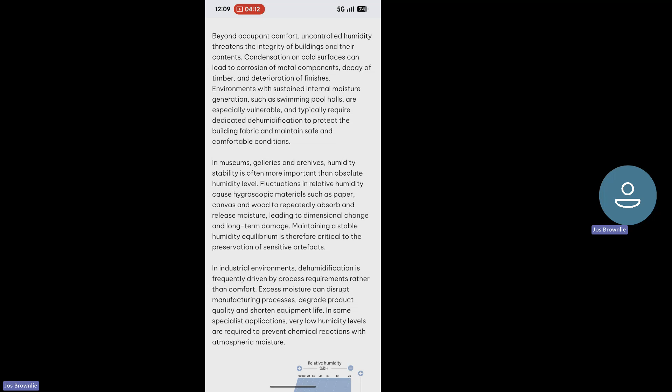Environments with sustained internal moisture generation, such as swimming pool halls, are especially vulnerable and typically require dedicated dehumidification to protect the building fabric and maintain safe and comfortable conditions. In museums, galleries, and archives, humidity stability is often more important than absolute humidity levels. Fluctuations in relative humidity cause hygroscopic materials such as paper, canvas, and wood to repeatedly absorb and release moisture, leading to dimensional change and long-term damage. Maintaining a stable humidity equilibrium is therefore critical to the preservation of sensitive artifacts.

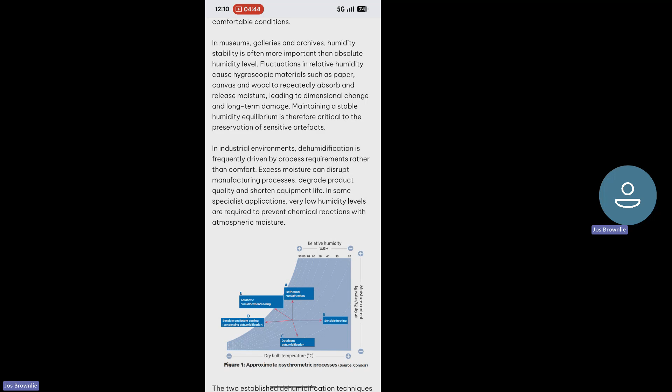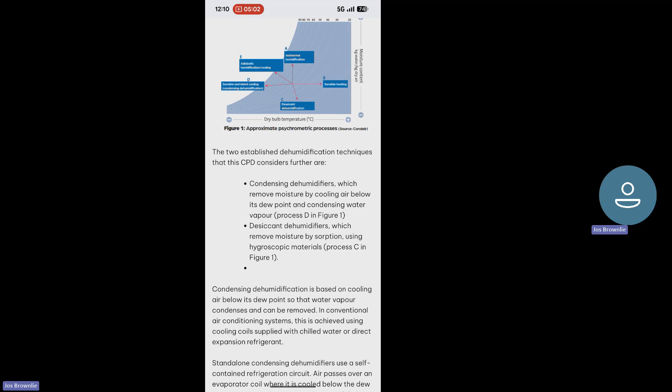In industrial environments, dehumidification is frequently driven by process requirements rather than comfort. Excess moisture can disrupt manufacturing processes, degrade product quality, and shorten equipment life. In some specialist applications, very low humidity levels are required to prevent chemical reactions with atmospheric moisture. The two established dehumidification techniques that this CPD considers further are condensing dehumidifiers, which remove moisture by cooling air below its dew point and condensing water vapor, and desiccant dehumidifiers, which remove moisture by sorption using hygroscopic materials.

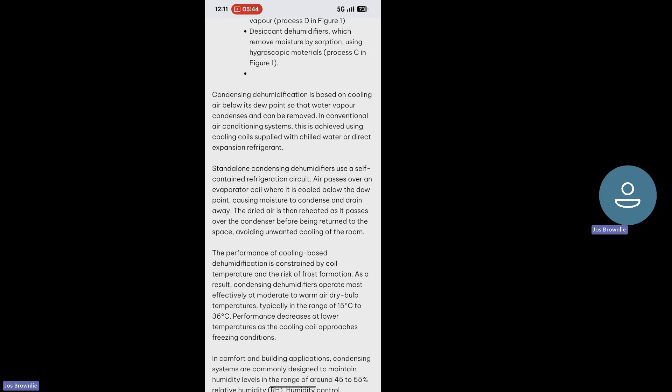Condensing dehumidification is based on cooling air below its dew point so that water vapor condenses and can be removed. In conventional air conditioning systems, this is achieved using cooling coils supplied with chilled water or direct expansion refrigerant. Standalone condensing dehumidifiers use a self-contained refrigeration circuit. Air passes over an evaporator coil where it is cooled below the dew point, causing moisture to condense and drain away. The dried air is then reheated as it passes over the condenser before being returned to the space, avoiding unwanted cooling of the room.

The performance of cooling-based dehumidification is constrained by coil temperature and the risk of frost formation. As a result, condensing dehumidifiers operate most effectively at moderate to warm air dry bulb temperatures, typically in the range of 15 to 36°C. Performance decreases at lower temperatures as the cooling coil approaches freezing conditions. In comfort and building applications, condensing systems are commonly designed to maintain humidity levels in the range of around 45 to 55% relative humidity, or RH.

Humidity control tolerances are typically wider than those for temperature control, reflecting both sensor limitations and the slower dynamic response of latent loads. Achieving lower humidity levels or tighter control is possible, but generally requires increased system complexity and higher energy use. Under typical comfort conditions, condensing dehumidifiers generally consume less energy per kilogram of water removed than desiccant systems. Specific energy consumption commonly lies in the range of approximately 0.5 to 1.5 kWh per kilogram of moisture removed, depending on operating conditions and system design.

Condensing dehumidifiers are usually simple to install, typically requiring only an electrical supply and provision for condensate drainage. They are commonly used to provide local humidity control directly within a space and may be either fixed or portable units. Condensing dehumidifiers are well suited to applications where air temperatures are moderate to warm, target humidity levels are above approximately 45 to 50% RH, and control tolerances are relatively relaxed.

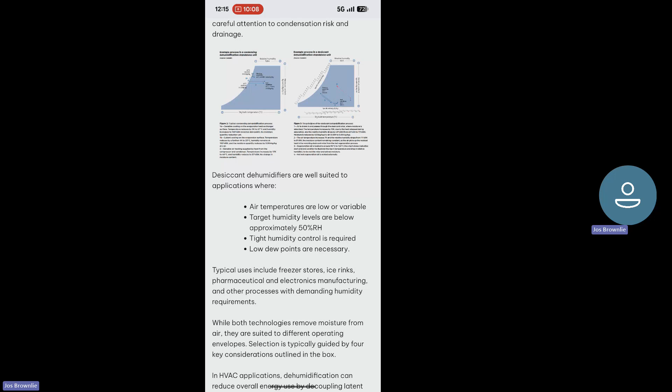Desiccant units are usually fixed installations. They may be located either within the space being treated or externally, depending on access, temperature, and maintenance factors. The regeneration air exhaust must be ducted with careful attention to condensation risk and drainage. Desiccant dehumidifiers are well suited to applications where air temperatures are low or variable, target humidity levels are below approximately 50% RH, tight humidity control is required, and low dew points are necessary. Typical uses include freezer stores, ice rinks, pharmaceutical and electronics manufacturing, and other processes with demanding humidity requirements.

While both technologies remove moisture from air, they are suited to different operating envelopes. Selection is typically guided by 4 key considerations outlined in the box. In HVAC applications, dehumidification can reduce overall energy use by decoupling latent moisture and sensible temperature loads. Where humidity is controlled solely by cooling air below its dew point, systems may overcool the air or require reheat, both of which increase energy consumption.

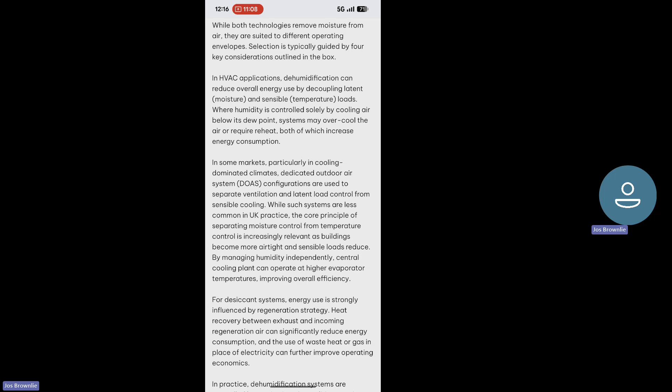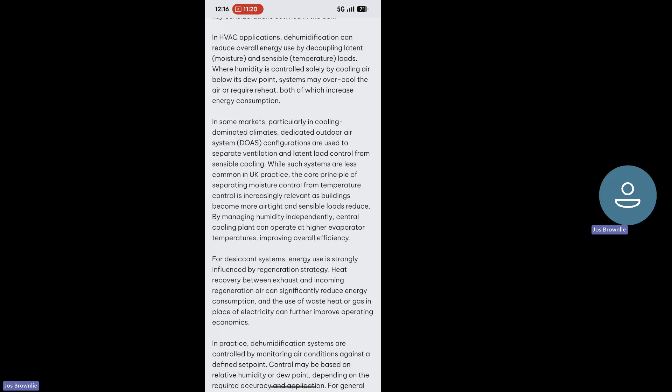In some markets, particularly in cooling-dominated climates, dedicated outdoor air systems, or DOAS configurations, are used to separate ventilation and latent load control from sensible cooling. While such systems are less common in UK practice, the core principle of separating moisture control from temperature control is increasingly relevant as buildings become more airtight and sensible loads reduce. By managing humidity independently, central cooling plant can operate at higher evaporator temperatures, improving overall efficiency.

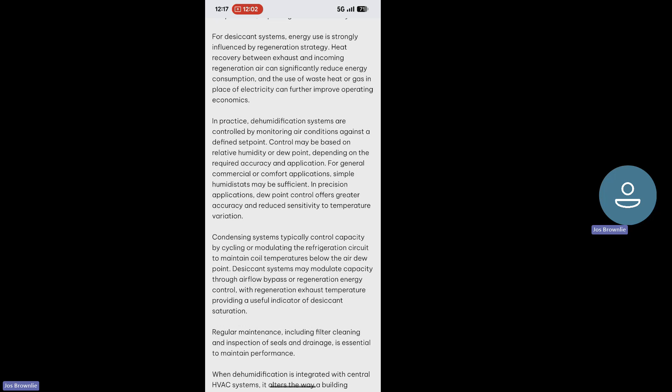For desiccant systems, energy use is strongly influenced by regeneration strategy. Heat recovery between exhaust and incoming regeneration air can significantly reduce energy consumption, and the use of waste heat or gas in place of electricity can further improve operating economics. In practice, dehumidification systems are controlled by monitoring air conditions against a defined set point. Control may be based on relative humidity or dew point, depending on the required accuracy and application. For general commercial or comfort applications, simple humidistats may be sufficient. In precision applications, dew point control offers greater accuracy and reduced sensitivity to temperature variation.

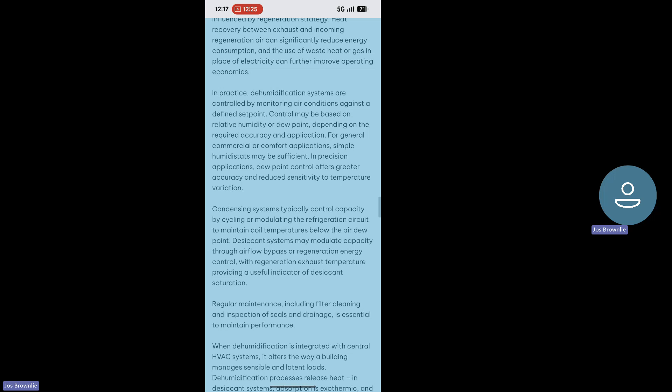Condensing systems typically control capacity by cycling or modulating the refrigeration circuit to maintain coil temperatures below the air dew point. Desiccant systems may modulate capacity through airflow bypass or regeneration energy control, with regeneration exhaust temperature providing a useful indicator of desiccant saturation. Regular maintenance, including filter cleaning and inspection of seals and drainage, is essential to maintain performance. When dehumidification is integrated with central HVAC systems, it alters the way a building manages sensible and latent loads.

Dehumidification processes release heat. In desiccant systems, adsorption is exothermic, and air typically leaves the unit warmer than it entered. In condensing systems, latent heat is rejected at the condenser and may need to be exhausted externally. Hybrid strategies can offer performance benefits. Cooling-based dehumidification is efficient at higher temperatures and moisture levels, while desiccant systems are effective at low temperatures or low dew points. Combining these two can optimize capital and operating costs. Lowering the building dew point through dehumidification enables radiant cooling systems, such as chilled beams, to operate safely, and can improve refrigeration efficiency in applications such as supermarkets.

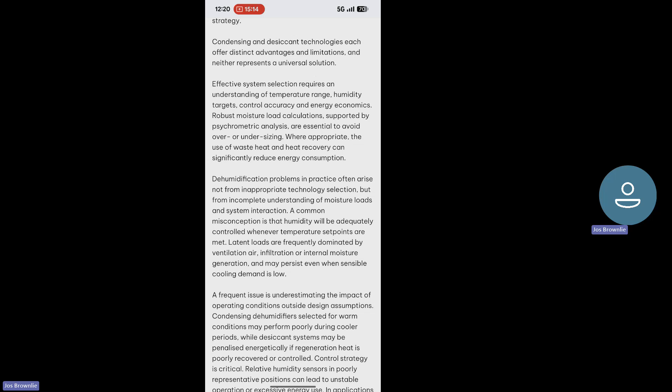Dehumidification problems in practice arise not from inappropriate technology selection, but from incomplete understanding of moisture loads and system interaction. A common misconception is that humidity will be adequately controlled whenever temperature set points are met. Latent loads are frequently dominated by ventilation air, infiltration, or internal moisture generation, and may persist even when sensible cooling demand is low. A frequent issue is underestimating the impact of operating conditions outside design assumptions.

Condensing dehumidifiers selected for warm conditions may perform poorly during cooler periods, while desiccant systems may be penalized energetically if regeneration heat is poorly recovered or controlled. Control strategy is critical. Relative humidity sensors in poorly representative positions can lead to unstable operation or excessive energy use. In applications with varying air temperatures, reliance on relative humidity alone may mask underlying moisture conditions, whereas dew point control can give a more robust indication of latent load.

Dehumidification is often treated as an isolated system rather than as part of the wider environmental strategy. Failure to account for the heat released during moisture removal or for interactions with cooling, heating and ventilation systems can undermine both comfort and energy performance. Early coordination between dehumidification, ventilation, and cooling design is therefore essential. Ultimately, successful dehumidification depends less on the choice of technology alone and more on informed engineering judgment and thoughtful integration within the wider environmental control strategy.

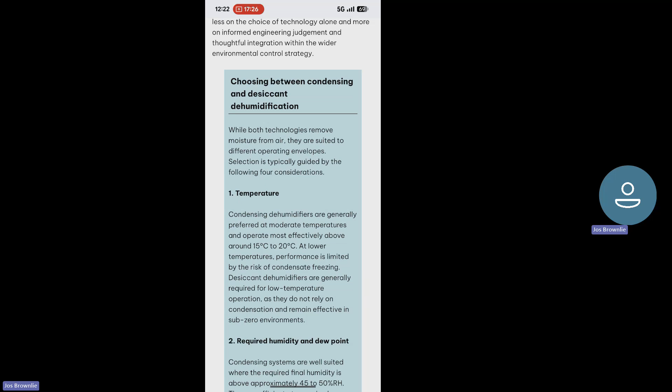Choosing between condensing and desiccant dehumidification. While both technologies remove moisture from the air, they are suited to different operating envelopes. Selection is typically guided by the following four considerations. Temperature. Condensing dehumidifiers are generally preferred at moderate temperatures and operate most effectively above around 15 to 20 degrees C. At lower temperatures, performance is limited by the risk of condensate freezing.

Desiccant dehumidifiers are generally required for low temperature operation as they do not rely on condensation and remain effective in sub-zero environments. Required humidity and dew point. Condensing systems are well suited where the required final humidity is above approximately 45 to 50% RH. They are efficient at removing large quantities of moisture from damp air, but are less effective at achieving low dew points. Desiccant systems are better suited where lower humidity levels or very low dew points are required.

Control accuracy. Condensing dehumidifiers typically maintain humidity within a wider control band, often around plus or minus 10% RH. Desiccant systems offer greater stability and precision and are appropriate where tight humidity control is critical. Energy and operating economics. Where operating conditions permit, condensing dehumidifiers are often favored owing to lower electrical energy consumption. Desiccant systems become more attractive where low-cost thermal energy is available for regeneration, such as waste heat from other processes. They also discharge warmer air, which may be beneficial in drying applications, but can require post-cooling in temperature-sensitive environments.